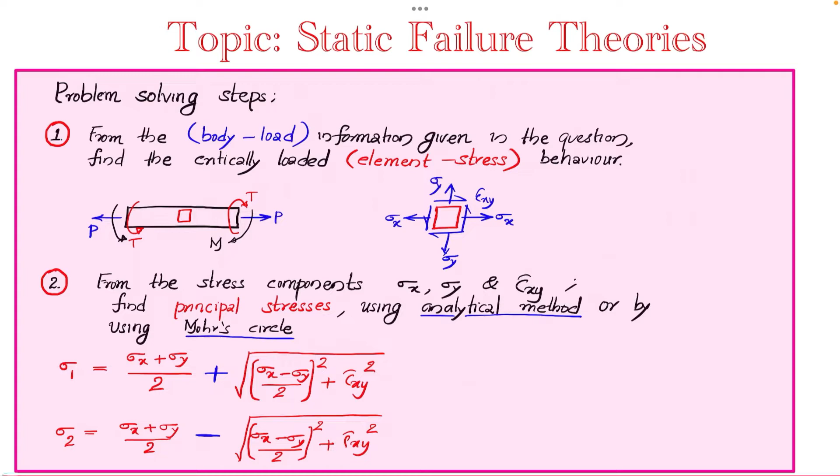Once you evaluate the principal stresses, then you can apply the failure theories. We have studied 5 theories of failure. First I will be giving you why we are using theories of failure.

We are getting the properties of material under static loading, meaning the load is constant or steady with respect to time. The actual property sigma y is obtained from a uniaxial tension test, where the loading is uniaxial, acting in a single direction, and it is axial load. But the component may be subjected to combined axial, bending, or twisting moment. In such cases, you cannot predict the failure based on this property sigma y obtained from the uniaxial test, so you need to compare some other parameters with respect to this standard property sigma y.

I have made a video on why we need to formulate the theories of failure; the link for the same I will provide in the description. That is why we use failure theories, and static failure theories apply where the load is constant with respect to time.

We will be studying 5 different theories, based on the criteria we are comparing with the property sigma yield or sigma ultimate. Sigma yield property will be used for ductile materials, and sigma ultimate will be used for brittle material.

In maximum principal stress theory, also known as Rankine's theory, we compare the maximum principal stress with respect to the property obtained from the simple tension test. For safe working, the maximum principal stress should be lesser than or equal to the property divided by factor of safety, otherwise just simply sigma y.

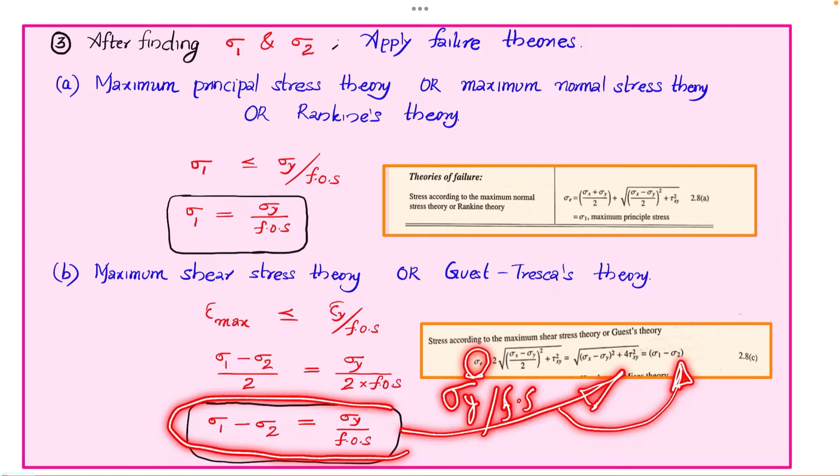You need to only look for the left extreme value. This sigma E or equivalent represents the property sigma y by Fs, and the right side is based on the load applied, that is sigma 1 minus sigma 2. This is the simplified expression for the maximum shear stress theory. Similarly, I will be showing you the other 3 theories and their equations also.

Next one is maximum principal strain theory, where we use this equation: sigma 1 minus mu sigma 2. Earlier it was only sigma 1 minus sigma 2. Here it is sigma 1 minus mu sigma 2 equal to, again the right hand side is same, sigma y by factor of safety, assuming it is a ductile material. Otherwise we need to use sigma ultimate, sigma u by FOS.

Similarly, the last theory is the maximum shear energy theory, or distortion energy theory, or von Mises theory. It is square root of sigma 1 square plus sigma 2 square minus sigma 1 sigma 2 equal to sigma y by FOS. So these equations are given in the data book.

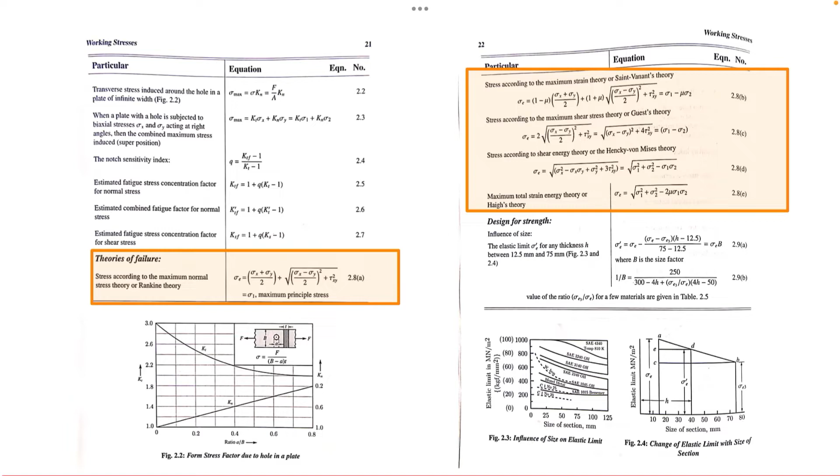Based on this, we will be solving a simple problem. Here again I am showing you the data book pages containing these required equations, on page number 21 and 22. These equations are highlighted here. This is the first theory, and these are the next four theories of failure. Each name is also shown here.

So here we will first start with the problem. We are having a mild steel shaft whose diameter is unknown, and that diameter we have to evaluate based on each of these failure theories. So diameter is the unknown, and this is subjected to a bending moment at its critical point. We need to only think about the values at the critical point. There is no need to evaluate the critical sections or critical elements; only we need to take the values.

Bending moment at the critically loaded point is M equal to 3500 Newton meter, given in SI units. And it is subjected to a torque also, so it is a combined loading case where bending moment and torque are acting. Torque value is 2500 Newton meter.

Next step, we need to evaluate the principal stresses as I mentioned earlier. For that, based on the previous understanding, we need to find the type of stresses developed because of these applied loads. Because of the bending moment, bending normal stress will be produced, sigma b, and because of this applied torque, torsional shear stress will be produced. The equations for this are given in this data book page, equations 1.1.

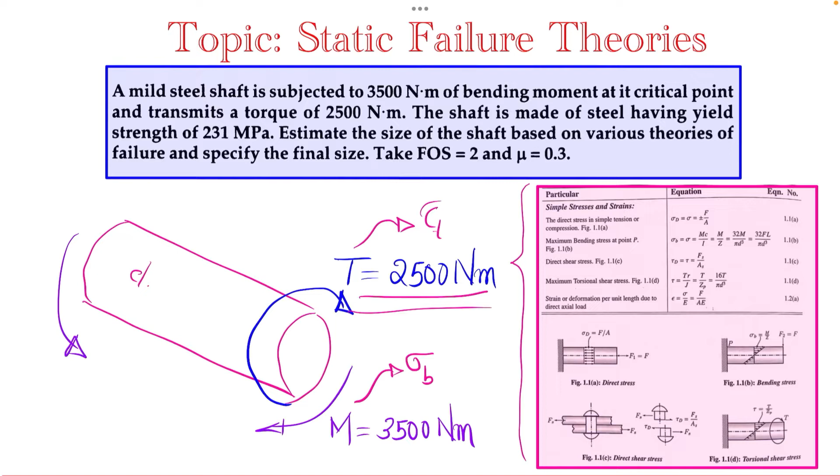If it is subjected to bending moment, we use the equation 32M divided by pi d cube, so sigma b will be equal to 32M divided by pi d cube. And if it is subjected to torque, the torsional shear stress equation applies: 16T by pi d cube. And I will be marking the critical element.

The critical element lies at the outermost top surface, as shown in earlier videos. Torsional shear will be maximum at the extreme point from the center, along all points of the outer surface, but with respect to bending, the critical element lies at the topmost and bottommost. So I am taking the topmost point. This will be sigma b, and here also the normal stress will be sigma b.

The next one is shear. Torsional shear will be acting in this direction, so this will be tau. I can represent the element in a straight rectangular form here, and here I can mark the bending stress sigma b. Again the torsional shear stress acting like this.

So if you observe, this sigma b is actually the normal stress along sigma x direction, and there is no normal stress along y direction, so sigma y component is 0. And this tau t is the torsional shear produced, which I can represent as tau xy, actually the torsional shear produced due to the torque applied.

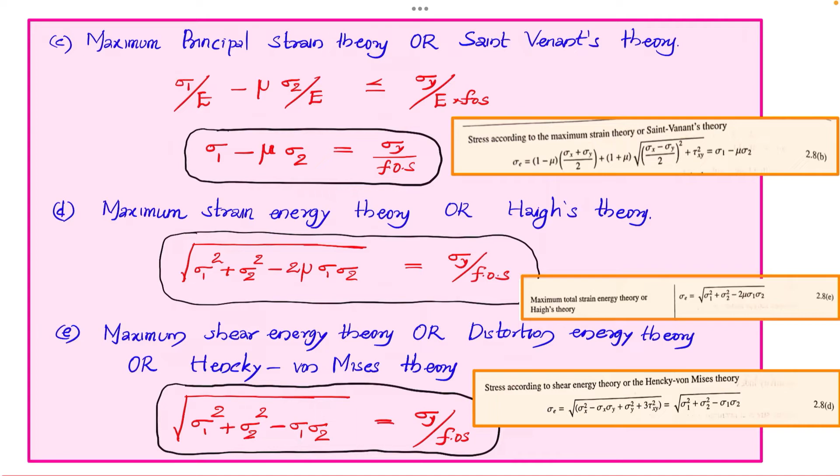One point to note is that earlier in these equations I have used the property sigma yield as sigma y, representing yield strength. But here in the two-dimensional state of stress, I am also using sigma y. I could have used some other notation, but you should understand what it is: the stress component along the y direction. Here sigma y, the stress along y direction, is 0, but actually yield strength is given separately in the problem, so in that equation sigma y is different. Anyway, this component is 0.

Based on these values, I will be evaluating the principal stresses. For that, I need to simplify these components, that is sigma b and tau xy, or tau t. So understand this.

Here sigma x value is equal to, due to bending, sigma b, which is 32 m by pi d cube, and sigma y value is 0, and tau xy value is equal to the torsional shear tau t, which is equal to 16t by pi d cube.

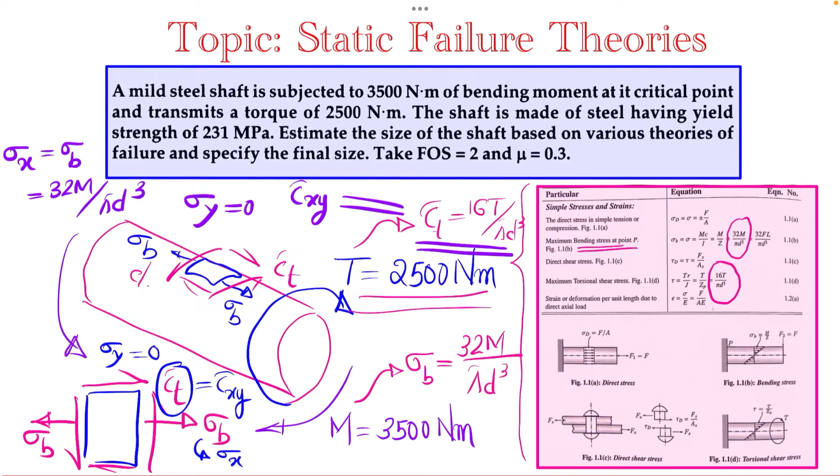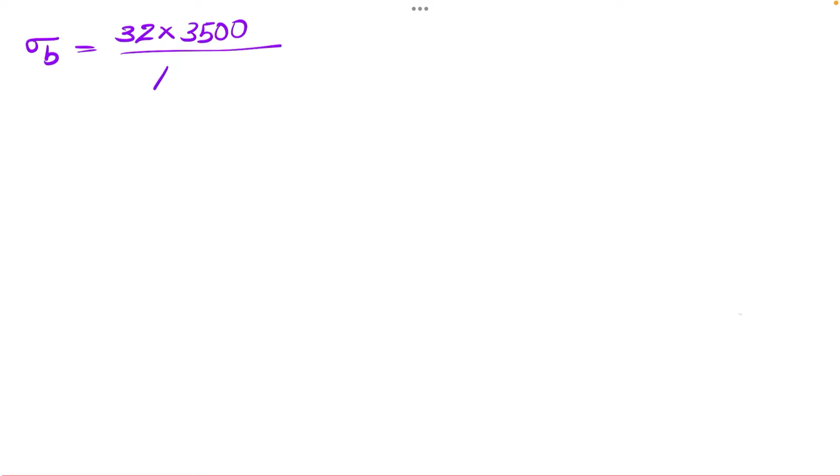Based on this, I will be finding the stress components. First I can calculate sigma b, which is 32 m by pi d cube. 32 into bending moment, given in the problem as 3500 Newton meter, divided by pi d cube. D is the unknown, so I can keep d cube in the denominator. Then we will be getting a value of 35,651 divided by d cube.

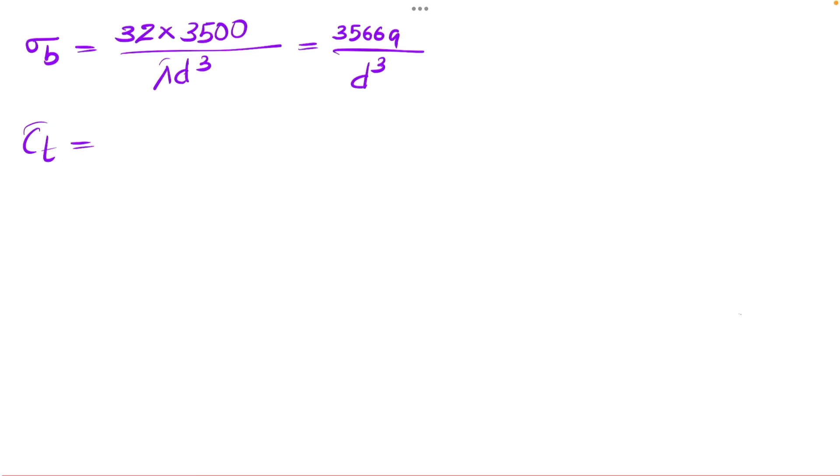Similarly, I can evaluate tau t, which is equal to 16 into torque, which is 2500 Newton meter, divided by pi d cube. Then that value we will be getting as 12,732 divided by d cube.

So this is actually sigma x, and this is our tau xy, and we know that sigma y, or the normal stress along the y direction, is 0. Please note that this is not the yield strength — we will be using the same notation later for applying the failure theory.

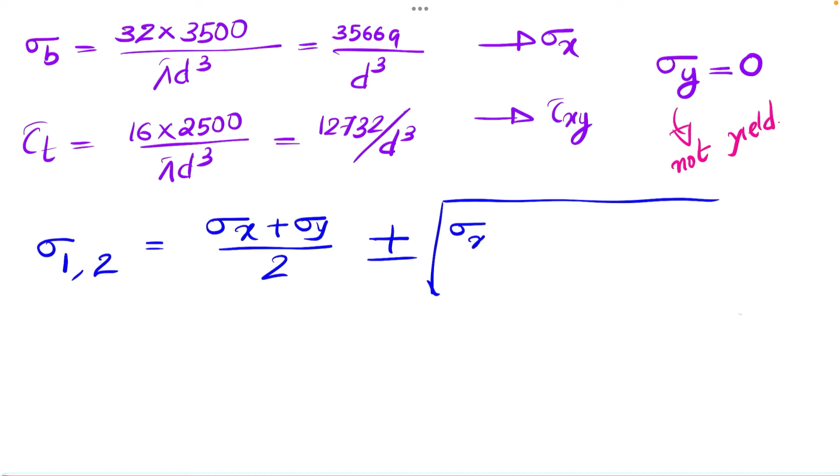From these components, I can evaluate the principal stresses sigma 1 and sigma 2. Sigma 1 will be the maximum principal stress and sigma 2 will be the minimum principal stress, based on the expression sigma x plus sigma y by 2, plus or minus square root of sigma x minus sigma y by 2 the whole square plus tau xy square. If substituting plus, we get sigma 1; otherwise sigma 2, the minimum principal stress.

This equation I have shown in the data book in earlier videos. Here sigma y is 0. So you can substitute sigma x as 35,669 by d cube and tau xy as 12,732 by d cube. Substituting with the plus sign, you get the expression for sigma 1, which is 39,747.3 divided by d cube, and the minimum principal stress sigma 2 will be minus 4,078.3 divided by d cube.

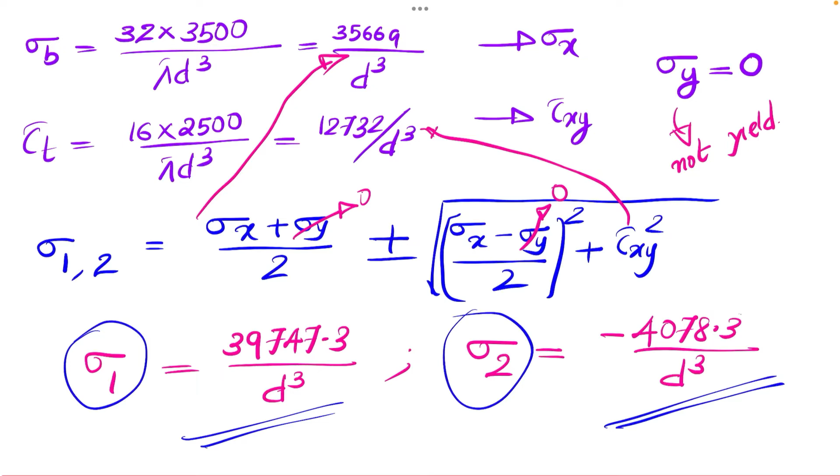You can try yourself and verify these values. So this is the maximum principal stress and minimum principal stress. This is the first step in solving problems from failure theories, specifically static failure theories. Once you evaluate the principal stresses sigma 1 and sigma 2, you can apply the static failure theories. Here we will solve the failure theories one by one and evaluate the diameter D of the shaft. Our first theory is the maximum principal stress theory, or Rankine's theory.

According to this theory, we are comparing the principal stress sigma 1 with respect to the yield strength. Here factor of safety is also given, so I will be considering this. This is the equation I have given earlier. Here sigma 1 value, which we have evaluated, is 39,747.3 divided by d cube.

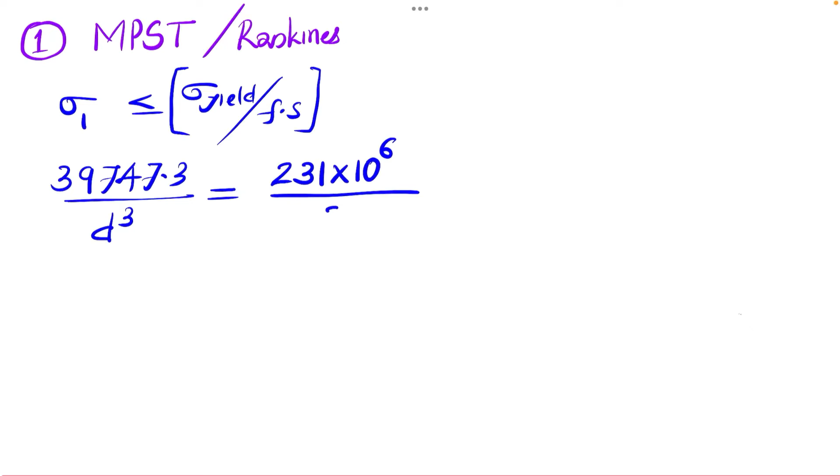In the limiting condition, I can put an equal sign. Yield strength is given in the question as 231 megapascal, or 231 into 10 raised to 6 SI units. I will substitute that, divided by factor of safety, which we have to take as a value of 2, as also mentioned here.

I can solve for D, so I will make use of the calculator — some part of the calculator is visible, but anyway this display page you can see here. So d cube will be equal to 2 times 39,747.3 divided by 231 into 10 raised to 6, and that value will be d cube.

So you need to find the value of cube root — the answer raised to 1 by 3 I can evaluate. Then you will be getting a value of 0.07007 SI units, which is meters, equivalent to 70.07 mm diameter for the shaft according to the first theory, that is the maximum principal stress theory.

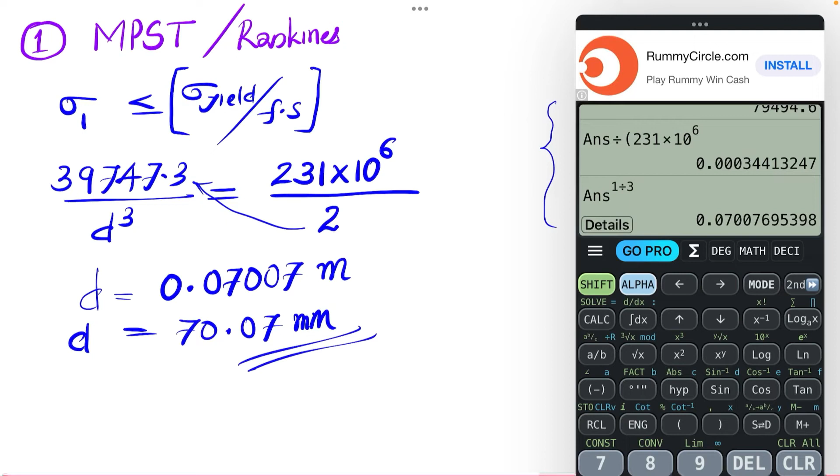So this is the answer for the first theory of failure. Next we will be applying the maximum shear stress theory, also known as the Guest-Tresca theory.

So here we are having the equation sigma 1 minus sigma 2 lesser than or equal to sigma yield divided by factor of safety. I will be applying the values of sigma 1 and sigma 2: 39,747.3 divided by d cube, minus sigma 2 value which is 4078.3 divided by d cube, equal to 231 into 10 raised to 6 by factor of safety is 2.

Here again this minus, actually it is also minus, so minus will be coming as plus. So here I can find the value of d cube. First I will be solving here.

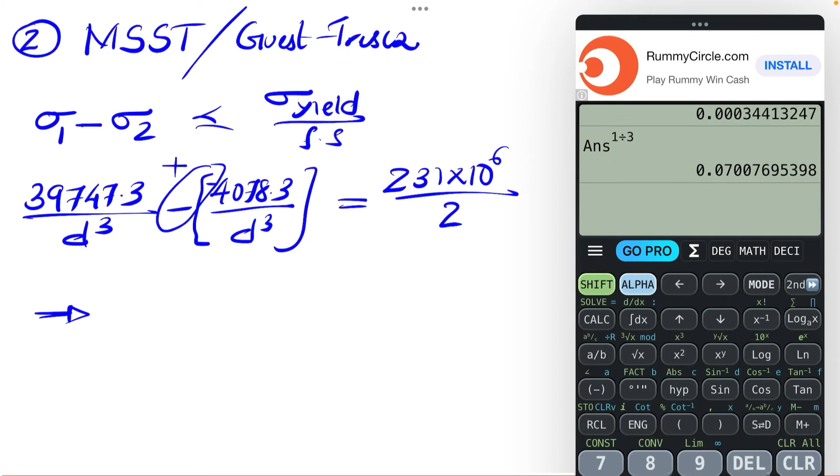39,747.3 plus 4078.3, into 2 factor of safety divided by 231 into 10 raised to 6, raised to 1 by 3. This above value is d cube, so I can find 1 by 3. Then you will be getting a value of d equal to 0.07239, which is equivalent to 72.39 mm.

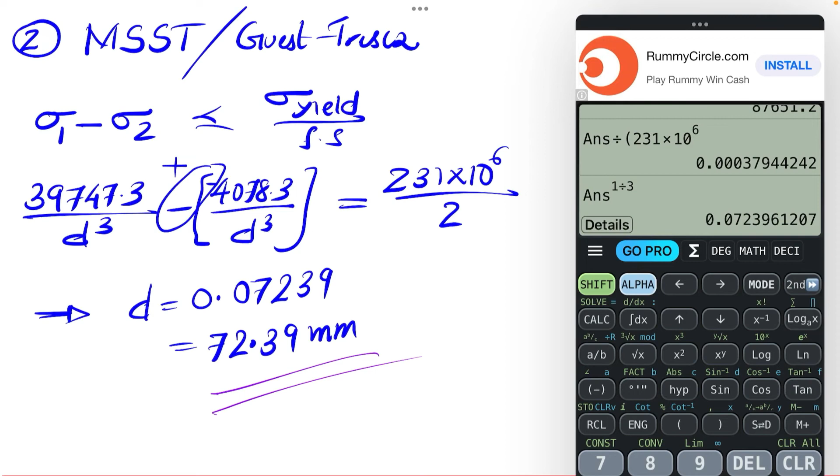Earlier we have obtained a value of 70 point something mm. Here it is 72.39 mm. So this is the value according to the second theory, maximum shear stress theory.

Next we will be applying the third theory, which is maximum principal strain theory. The equation I have shown in the data book, or Saint-Venant's theory. Here the equation is similar to the earlier case. It was sigma 1 minus sigma 2; this will be sigma 1 minus mu sigma 2, where mu is the Poisson ratio. Again this is lesser than or equal to the property sigma yield by factor of safety.

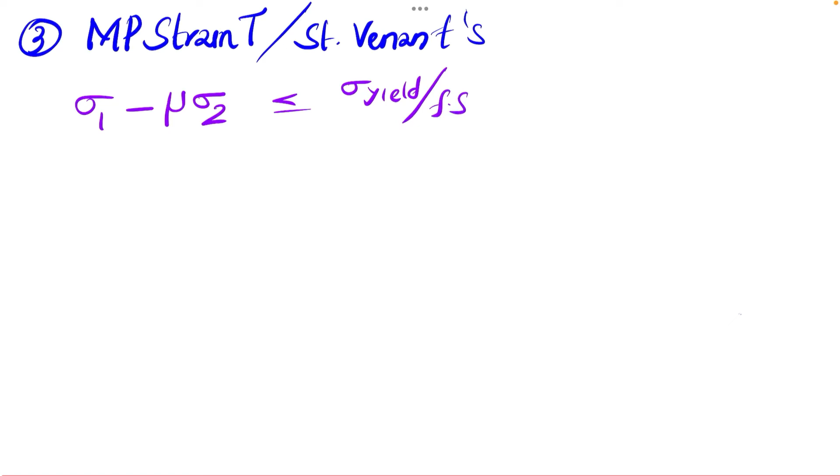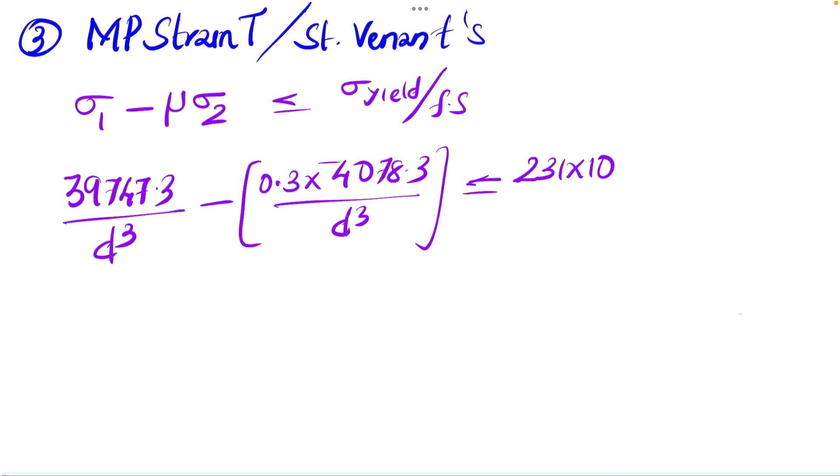Here material is ductile, so I will be applying the yield one. I can substitute the values: 39,747.3 divided by d cube, minus mu is 0.3 into sigma 2. Sigma 2 value is 4078.3 divided by d cube, lesser than. In the limiting case I can apply 231 into 10 raised to 6 by 2.

So again this one also I can solve using a calculator, and we can find the value of d. If you are solving this value, then you will be getting around 70.79 mm. So this is the one according to the third theory, that is the maximum principal strain theory.

Similarly, we can find the values of diameters for the next two theories. The fourth theory is maximum strain energy theory, also known as Haigh's theory. I have shown you the expression: this is sigma 1 square plus sigma 2 square minus 2 mu sigma 1 sigma 2, lesser than or equal to property sigma yield by factor of safety.

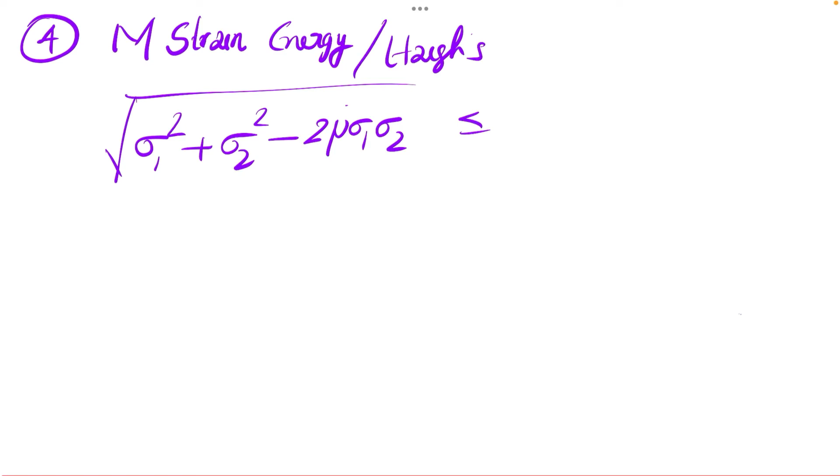Again these values you can substitute. Sigma 1 is 39,747.3 by d cube the whole square, plus 4078.3 by d cube the whole square, minus 2 into mu Poisson ratio given as 0.3 into these values, 39,000 something divided by d cube into the next value, that minus and minus will be coming as plus, which is 4078.3 divided by d cube and the whole square, which can be equated to 231 into 10 raised to 6 yield strength by factor of safety.

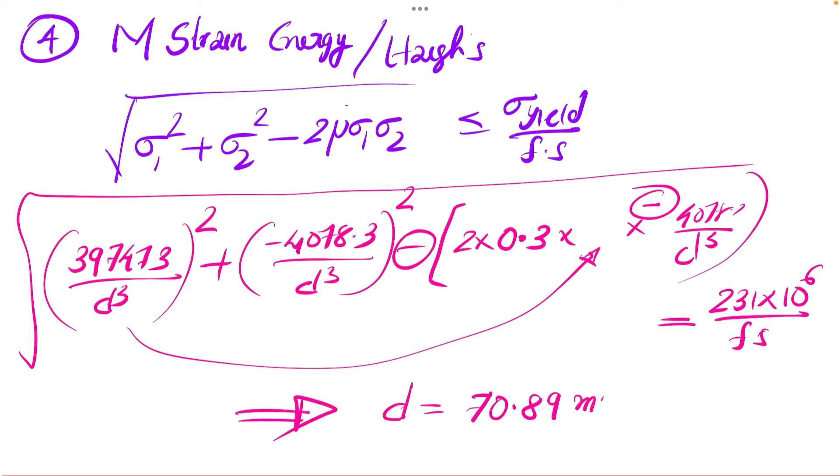Once you are solving this correctly, then you will be getting a value of diameter equal to 70.89 mm according to this one. In a similar way, we can solve for the last one, which is the maximum distortion energy theory.

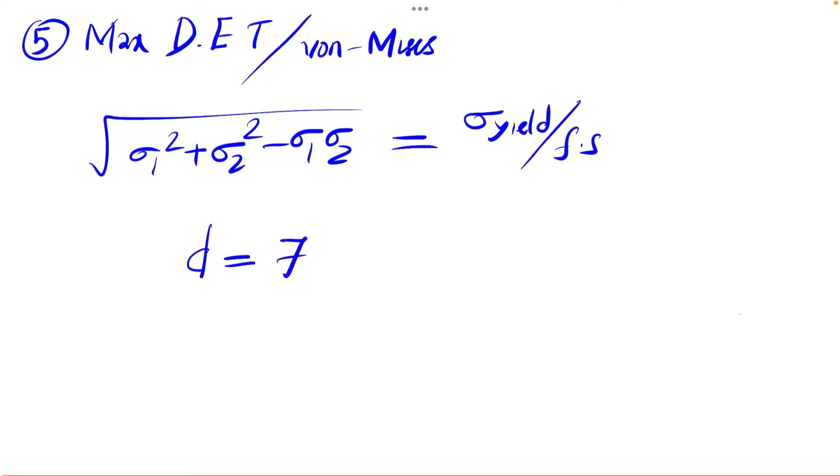Distortion energy theory, or it is also known as von Mises theory. Here the equation is sigma 1 square plus sigma 2 square minus sigma 1 sigma 2, instead of 2 mu sigma 1 sigma 2, it is minus sigma 1 sigma 2, and this can be equated to sigma yield by factor of safety in a similar way that I have shown earlier. Here also you can find the value of diameter d, then you will be getting a value of 71.34 mm.

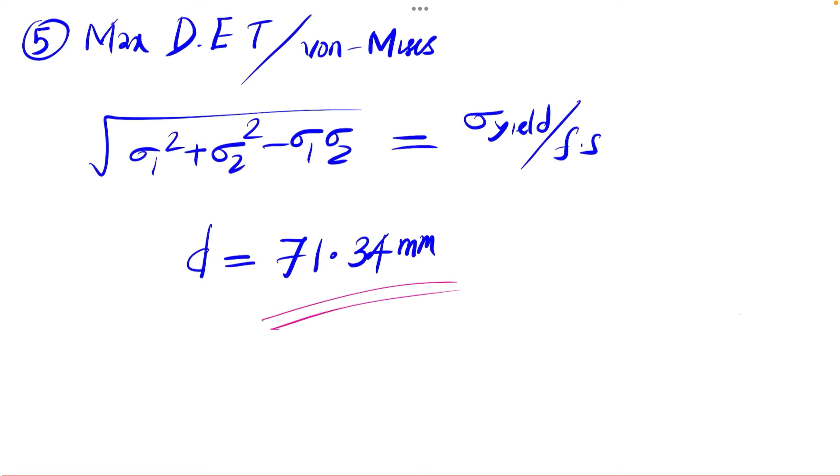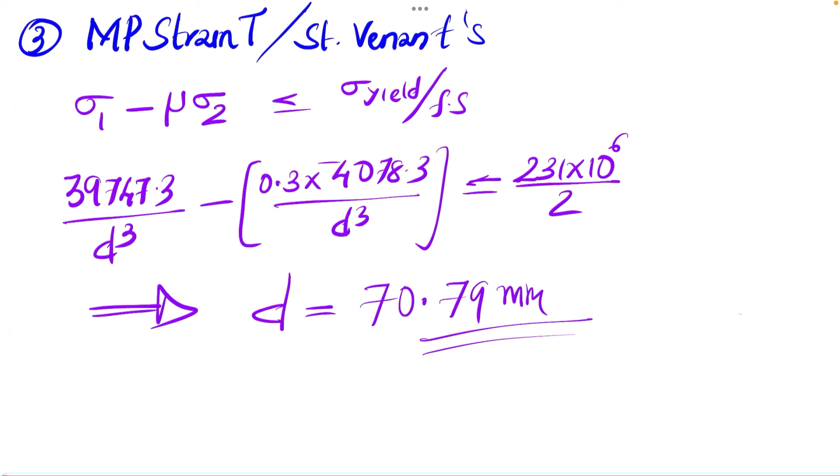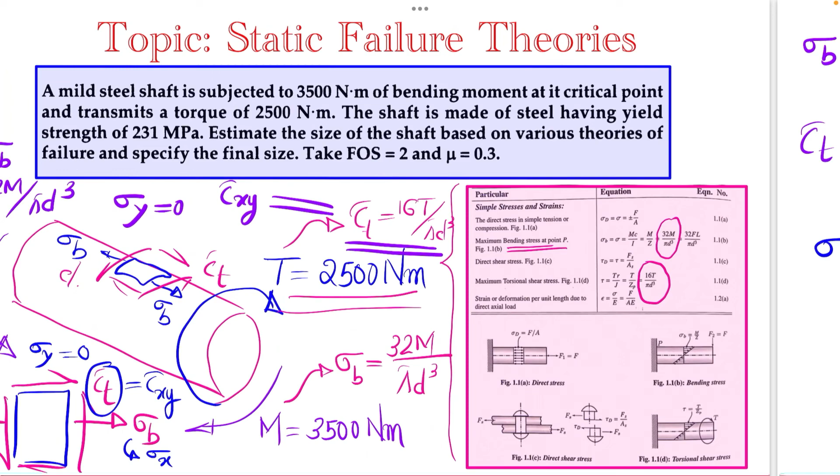So all the values are in the range of 70, 71, 72 around. This is the way how you have to solve a problem from the theories of failure. Here it is maximum distortion energy theory; earlier I solved with the strain energy theory 70.89 mm, and this is principal strain around 70.79. This is maximum shear stress, here we got the maximum value 72.39, and the other one, the first theory, maximum principal stress theory. First we need to evaluate the principal stresses, then we just need to apply the failure theories. So that's all for this one.